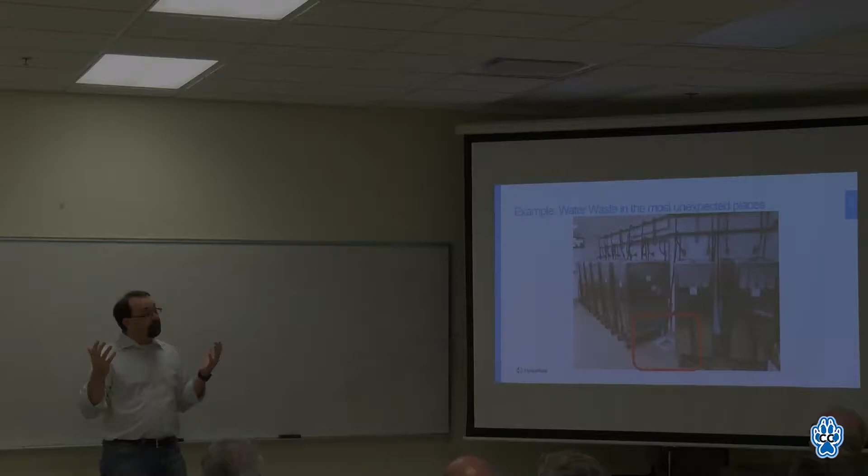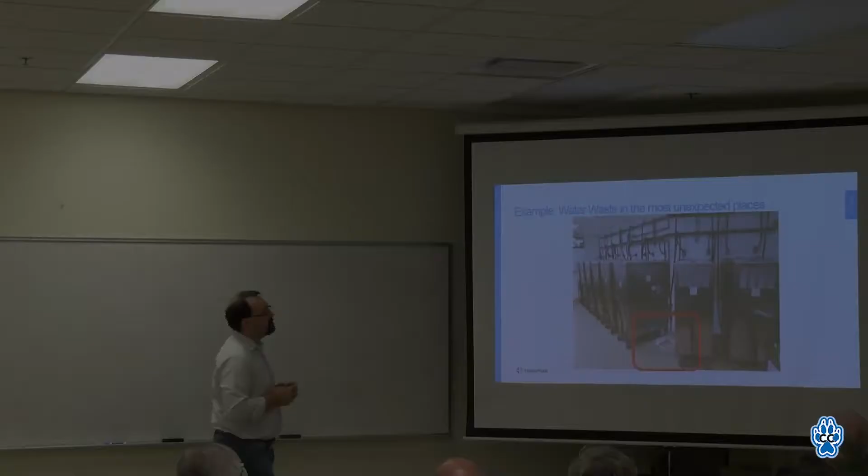The mall was paying for all of that water because it wasn't a restaurant. They didn't sub-meter the site. They didn't go and say, you're a heavy water user. It was a yogurt shop. But once they found out, with some of our technology, that they were having this waste, they were able to go find out that it was this yogurt shop, and the cost of the yogurt shop was over $3,000 additional per month to go and be using water as a cooling agent for their yogurt shop.

And the risks are more than just costs. So poor plant health, moldy foundations, hardscape damage, slip and fall injuries, as well as pollution runoff. Combined with all that, water is the fastest rising utility cost in the United States, faster than inflation and faster than all of the other utilities combined. And this is from the Bureau of Labor Statistics.

So typically people think, turn on the tap, get some water, it's very inexpensive. The cost of water is going up, but a benefit of that is now it's worth managing. Now people will start to pay attention. So water waste is no longer economically, legally, or socially sustainable. That's our premise.

And how do we solve this problem? Well, HydroPoint, my company, believes that we're going to solve this problem with data. By giving people data, by managing with data, by using information systems, whether they're IoT systems or control systems or visibility systems like dashboards, by giving people and devices data, we'll be able to better manage this water, control it, and hopefully we won't ever hit day zero.

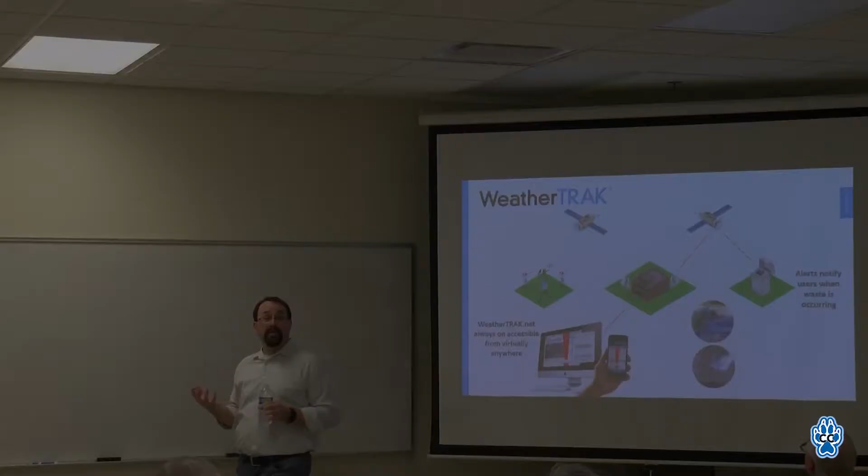And then we realized that we were really missing out. We're missing out because we're missing the other side. What happens when an event occurs? What happens when you've got flow going and nobody knows about it? You've got a leak, but nobody knows about it. And so now we've got two-way systems over typically a cellular network. That data goes back up through the cloud when that alert occurs, and then gives access and notification to users either via a website or via their mobile app.

All of these pieces kind of come together in a set of components. One of those is our hardware components. We've got irrigation control devices, flow control devices, flow sensing devices, mobile apps, and web apps. I've looked at the different hardware projects out there. We take some of that information and we create our own hardware components ultimately to provide both sensing and control capabilities.

In order to get that site-specific weather data, we calculate site-specific high-resolution weather data. We first collect over 8 million data points, including topography, vertical pressure profiles, half-kilometer level topography data where we're looking at the soil types. All of this information then goes into a physics weather-based model. So we take a bunch of raw data and put it into a fancy weather model that actually calculates based on climate physics what the weather's going to be for every square kilometer.

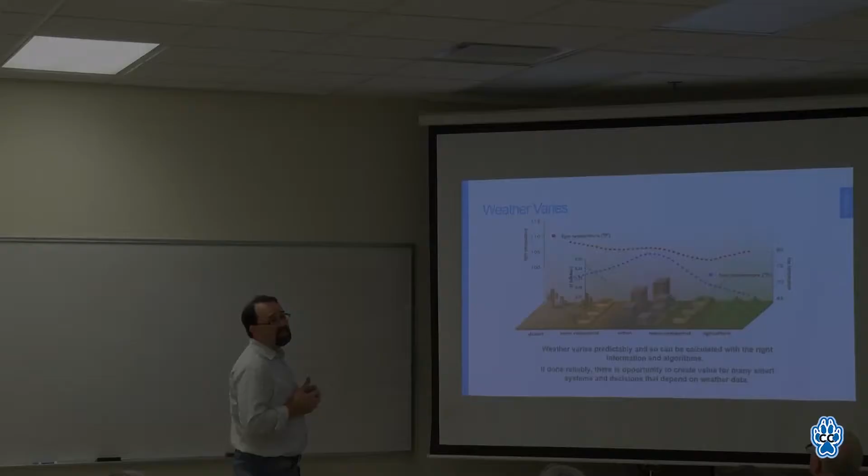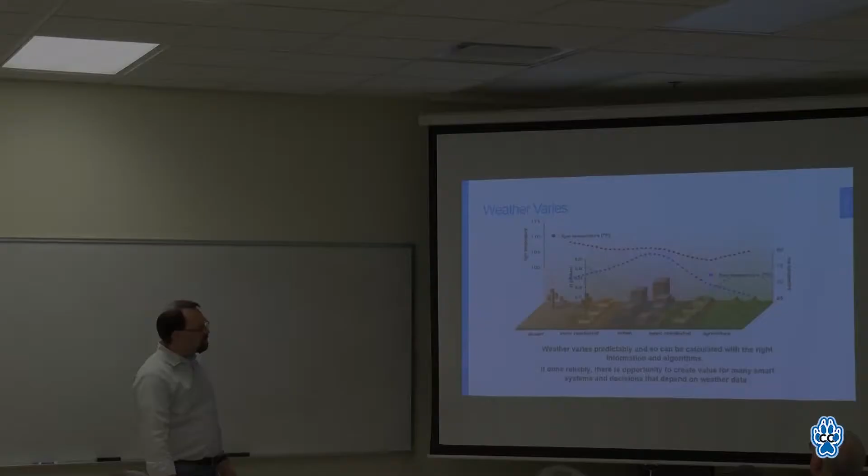We're doing all that in the cloud, which ultimately provides the ability for us to track weather at a very detailed level. So as you can see on the left, from a dry part of the city all the way through to a lush side, you have variations in temperature and wind, and overall there's a factor that we call evapotranspiration, which is the amount of water transpired from the plant leaf as well as evaporated from the soil. We're able to calculate that information across all of these different weather types and ultimately model down to about 1 square kilometer.

We had a study done on us by a group in Florida, and that study showed that we were within 2% of a weather station that we knew nothing about. That weather station was set up by a research organization, a university, and they were wondering how good our weather data was. So they put up a weather station miles away from others, and then compared our weather data to that location that we calculated.

So weather data is an important part, but now I've got weather data. What other information do I need? Well, one, we need plant type. Some plants need more water than other plants. We need root depth, because the plants can only uptake water to where their roots are. We need to know how much water that soil holds. Clay soil can hold a reasonable amount of water. Sandy soil can't hold much water at all. You go to the beach, pour water onto the sand, it doesn't hold much water at all, whereas clay soil can hold a lot of water.

You get into the climate, the microclimate. Is it sunny or is it shady? And ultimately, you get into slope. Do we do lots of little squirts of irrigation, or can we just put it on a flat surface and irrigate all at one time? And finally, the sprinkler type. The sprinkler type says how much water is coming out, how much water we are putting on that landscape at one time. And then with these different factors, we calculate a schedule.

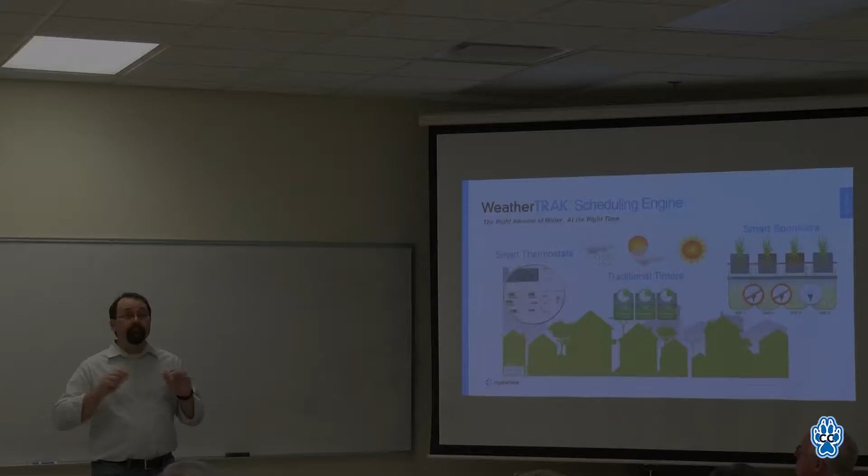So just providing a reference, irrigation schedules used to be like thermostats. You set it, and whatever you told it to, that's what it did. Maybe you set it once or twice a year. You don't really change it that often. Irrigation controllers were the same. With traditional timers, as they were called, whether it rained, it was foggy, it was windy, it was sunny, it was always running the same schedule.

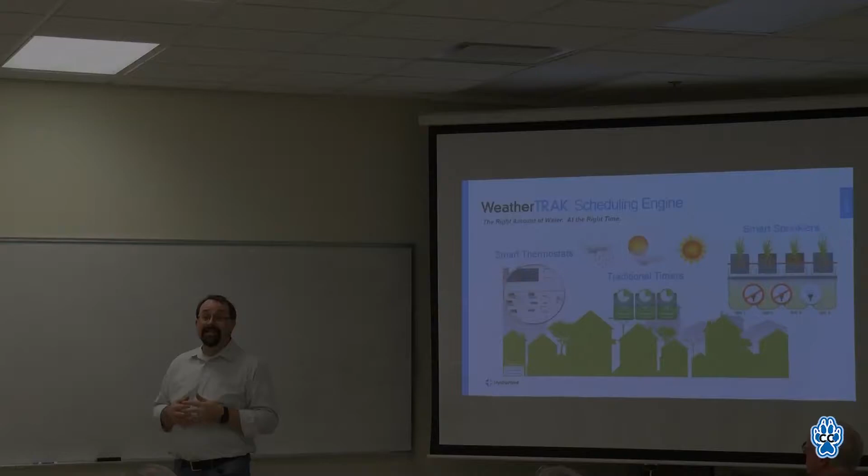With weather-based irrigation and smart timers and smart controllers, we're able to figure out, based on each individual area, how much water that individual plant needs and what the weather is, to figure out when it needs that water. So again, with all these different factors associated with the landscape and the weather data, we're able to incorporate this smart scheduling engine to get the right amount of water down at the right time.

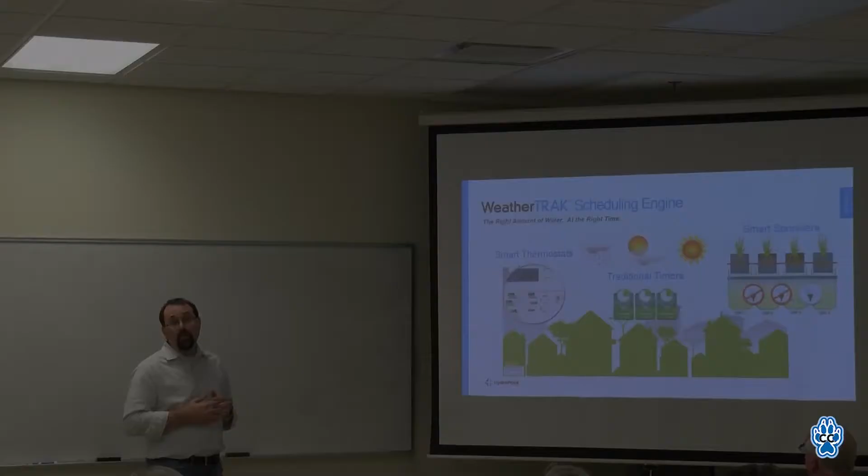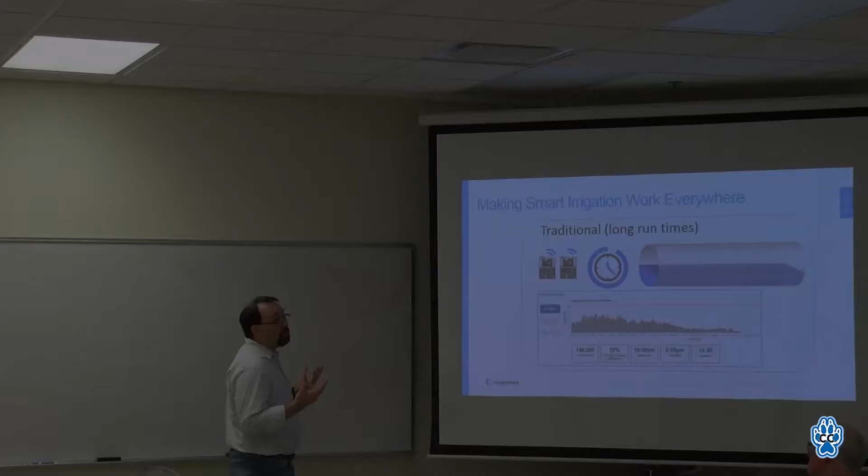A new area that we've also been focusing on is, great, you guys have figured out how to better put down the water onto the landscape, but can you do it for every spot? What comes out is that city parks, for example, or areas that are frequented by the public only have very limited water windows. They can only put water down in a very short amount of time.

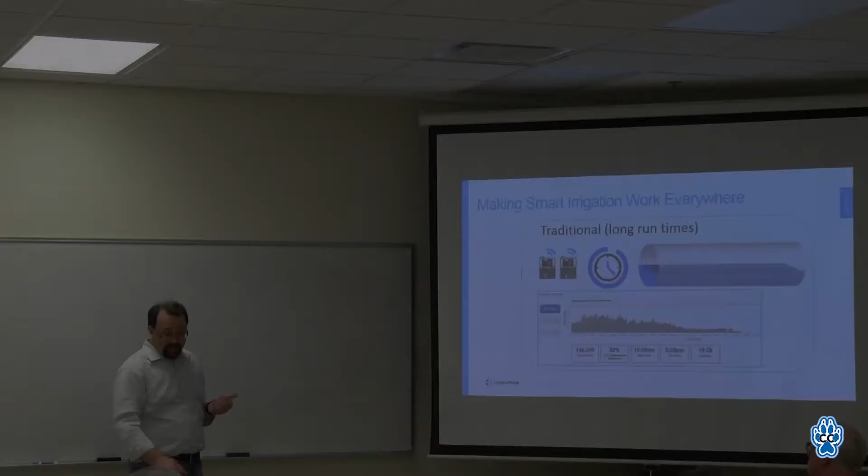Well, that can be very difficult, and so with these different systems, they typically are running these long water windows, and it takes a lot of human management to do that, because they have to start to think about water windows, site usage patterns, pipe sizes, pipe materials, pipe schematics, hydraulic capacity, and the list goes on and on of the different types of things that they have to think about in order to get that water optimized. And by using data, by using this information that we're able to capture through sensors, we're able to optimize.

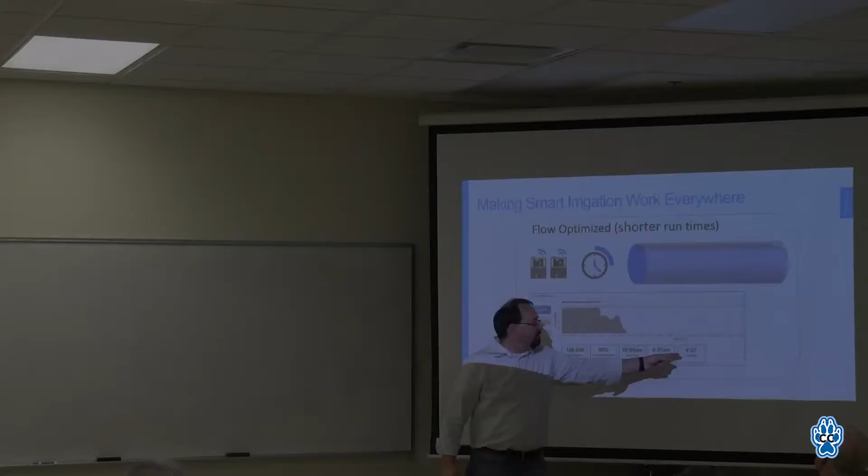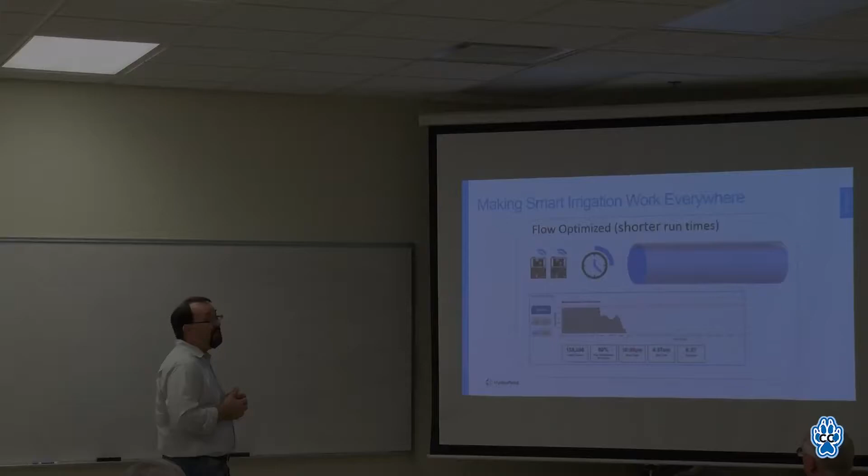I forgot to mention it, but here on the initial one, the duration of the time was 16 hours. So in an unoptimized schedule, it was 16 hours. When we're able to take all those elements into account, and we're able to optimize that schedule for that site's needs, we're able to knock off 10 hours, over half the time, and get it to run in about 6.5 hours.

So that's WeatherTRAK. WeatherTRAK, again, is about smart irrigation, about putting the right amount of water down at the right time and getting that right information to the right person at the right time. Then, as we had our customers start to say, you guys are doing a good job, what about if we look indoor? So as we were outdoor with WeatherTRAK, they then said, we think we have water problems. We want to get information about our leaks that are inside. So we created Water Compass.

One of the areas that we saw was that even small leaks can add up to a lot of water as well as a lot of dollars. So if you have a leaking toilet, which is probably the most common leak out there, over a day, it's 720 gallons. Sometimes, right, maybe people have done it here, go, oh, my toilet's leaking, I'll fix it in another day, right? For every day, that's 720 gallons. If that goes a whole month, that's 21,000 gallons. And ultimately, if you let it keep going, and it doesn't annoy you, it's 262,000 gallons for a year. And that's just a toilet leak.

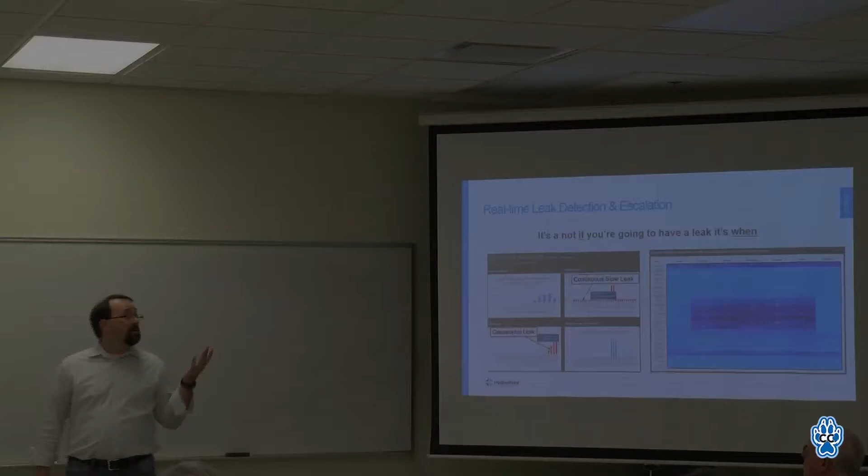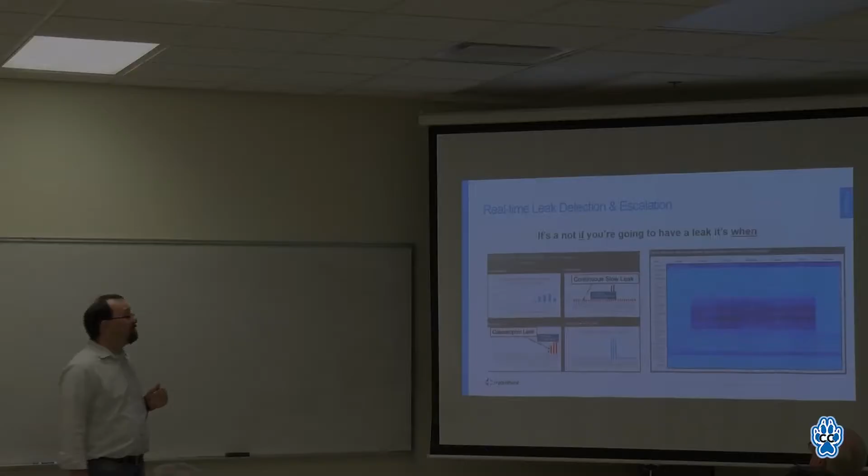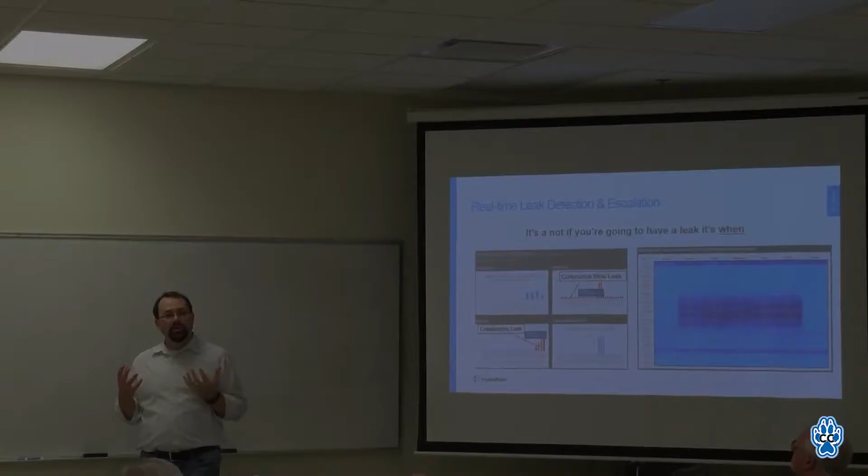So Water Compass was designed to get real-time leak detection and ultimately escalation, because it's not if you're going to have a leak, it's when. In fact, on 99% of every Water Compass device that we've installed so far, we found a leak. That's a scary statistic as far as how many leaks are out there on these different sites. And we're able to do great real-time analytics, provide people usage and visibility patterns, and bring all this data together through a user interface that allows people to take, again, actions.

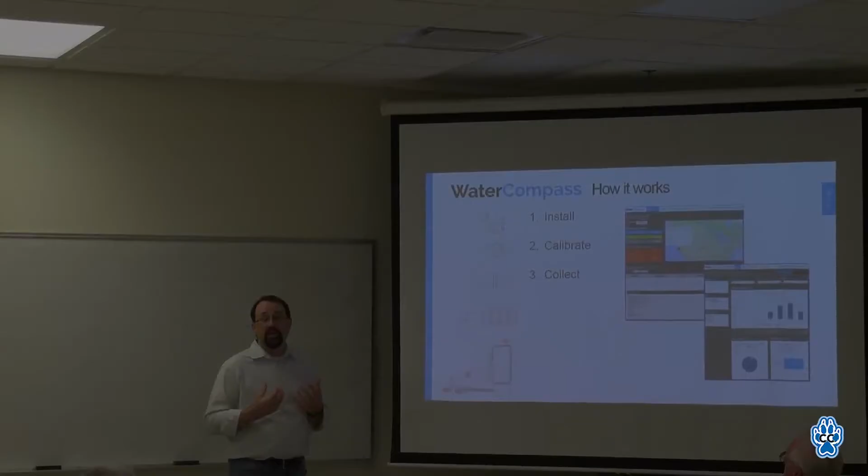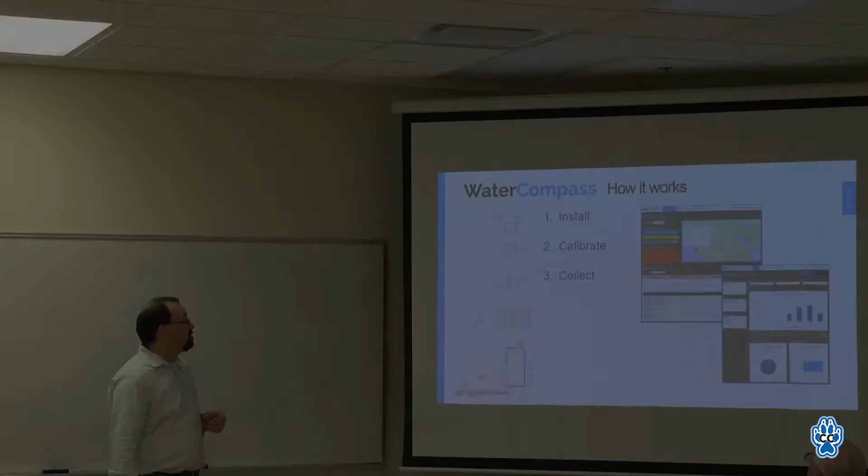How does it work? We have a device that we call a flow monitor, and you first install it on your existing water meter. You don't need to cut into a pipe. You just go onto where the water agency currently bills your water from, and you install a Water Compass flow monitor. We then calibrate it to that individual meter. It's using a cellular connection. We then start collecting that data. That data normally goes up on a daily basis to our server and gets analyzed. However, we're able to put thresholds in and put it up more often if we see super high usage. We then upload that data, and ultimately, we alert the user if they have any hidden leaks, large or small.

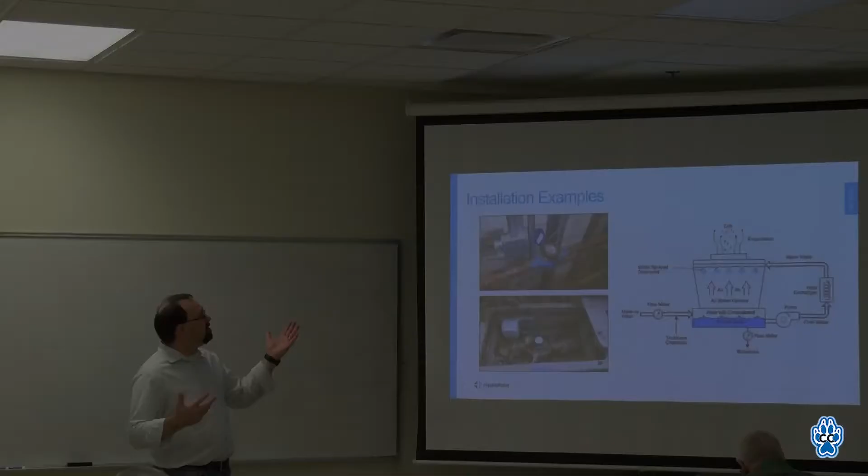Here are some installation examples. Some of them include regular water meters, like down here. That can be a dedicated irrigation meter. It could be a meter that's going into your house. It could be a meter that's going into a property. And there are different sizes and shapes and types of meters. One of the other bigger water users out there is called a cooling tower. A cooling tower is designed for cooling down large systems where there are compressors, essentially. Compressors get very hot and they need a way to cool down.

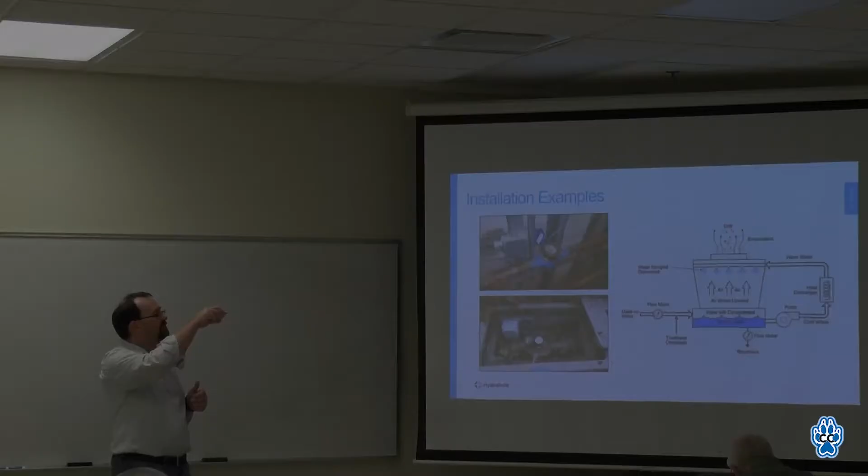And so water comes in, gets to this heat exchanger over here on the right-hand side. That water cools that heat exchanger, and that warm water comes up to the top, it gets sprayed, and the water essentially evaporates, comes down, and gets recirculated. Some of that water gets evaporated because it's hot. Some of it gets drift because there's wind going by the top. Ultimately, you have to fill up with makeup water to keep putting the water into that system.

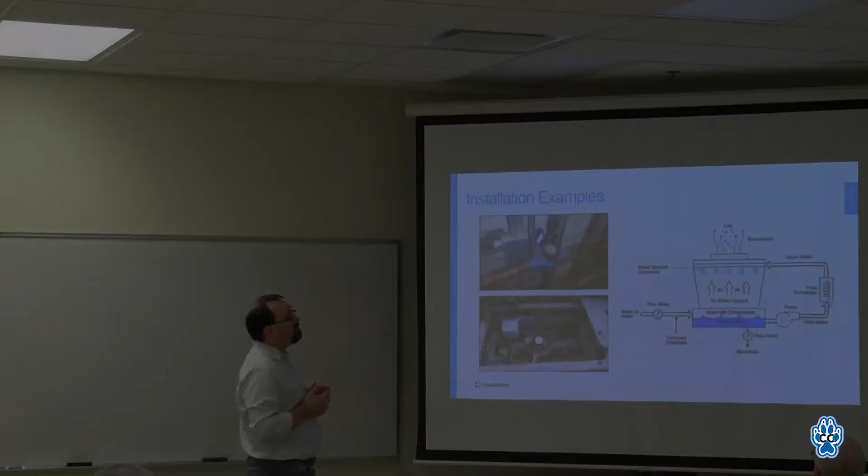And then because you have salts and other components, sometimes you need to do what's called blow down, or get rid of some of that water in that blow down. That whole process, people don't really regulate. It's a self-regulating system, but the problem is it doesn't regulate well all the time. So if suddenly water is starting to spill over because the makeup water is left open, nobody really sees that.

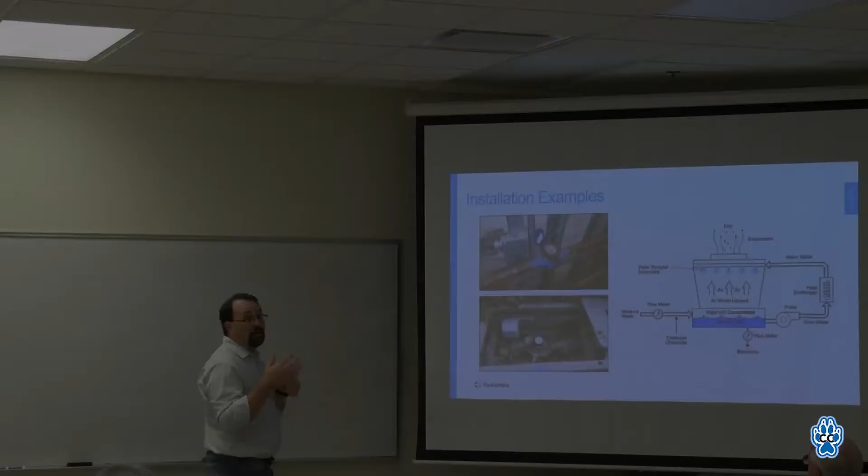And so with our system, with Water Compass, we're able to get real-time visibility on these types of systems to be able to provide alerting, alarming, and overall usage patterns to help them run these water cooling towers more efficiently, as well as let them know if they have any anomalies.

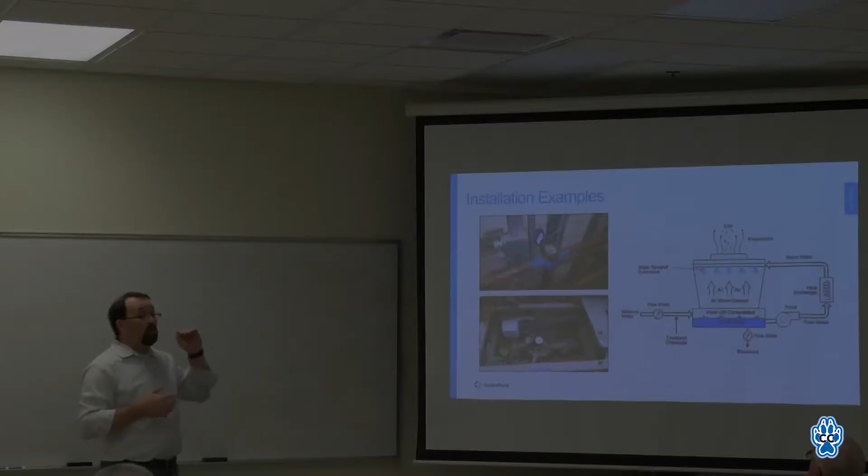Now, we haven't done it yet, but one of the areas that we're talking about is we have this great weather data. The cooling tower use should be correlated with that weather data so that we can utilize, again, more data to get more answers and help them solve these problems.

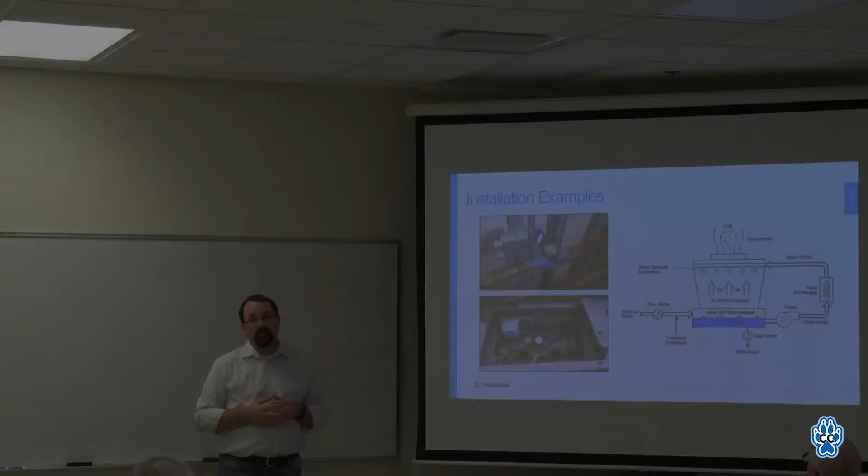So we've developed a professional services group which essentially helps customers take all of this data and roll it up. People can usually understand about 3 things when they keep them in their mind. We were able to roll it up into 6. And we said, well, that's not good enough. 6 is too many. So finally, we were able to roll it up into 3 main categories and provide the overall service: savings, risk, and operations.

It makes sense to an end user. It makes sense to a property manager who cares about money and who cares about how the property goes. So we're able to provide it in 3 main categories, and we give people grades and site grades, and it's really working out well. It makes sense, and we're taking all this complex data and rolling it up into simple factors.